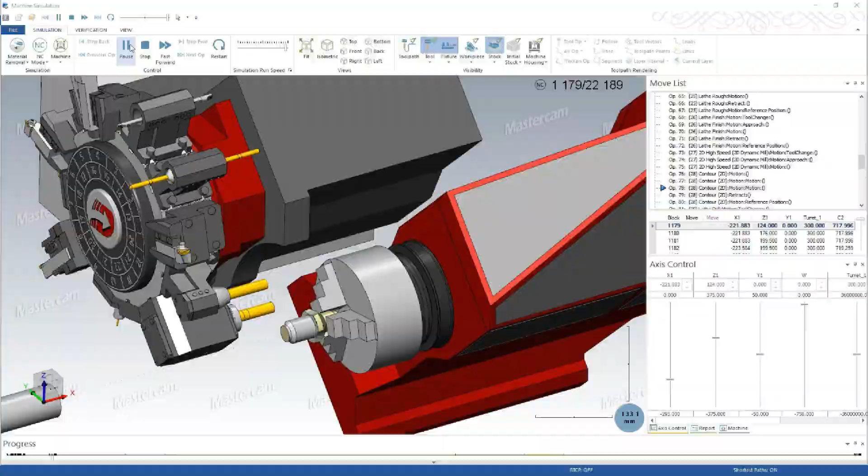In this video, we'll finish the changes needed in our setup to simulate with no collisions or errors, and we'll do this by changing our scallop toolpath from Y to C axis, and we'll create an extension for our 3mm cross end mill. One of the collisions simulation alerted us to is the machine housing hitting the chuck jaws while the 20mm face end mill is cutting the scallop feature, as we can see in this screenshot here.

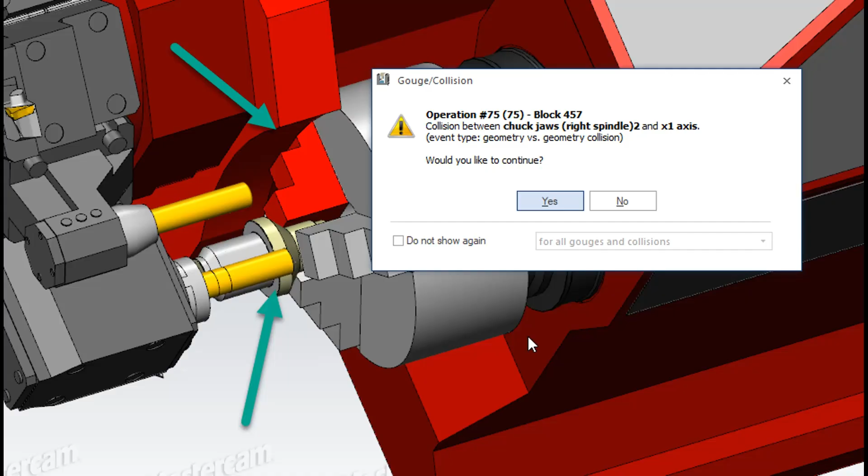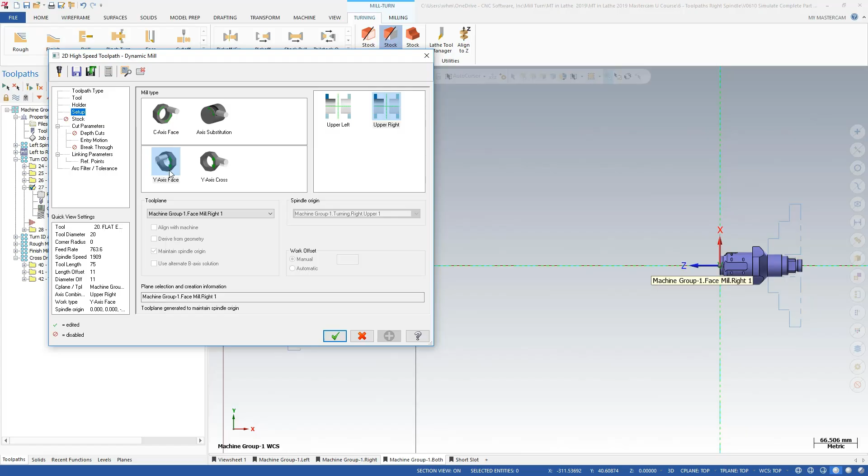and I'll open operation 27 and the parameters, and in MT for lathe you can see in the setup node we have selected Y-axis face. I'll simply select C-axis face and green check out. I'll do the same thing for the finish operation on that contour. And I'll regen all, and that should take care of that collision.

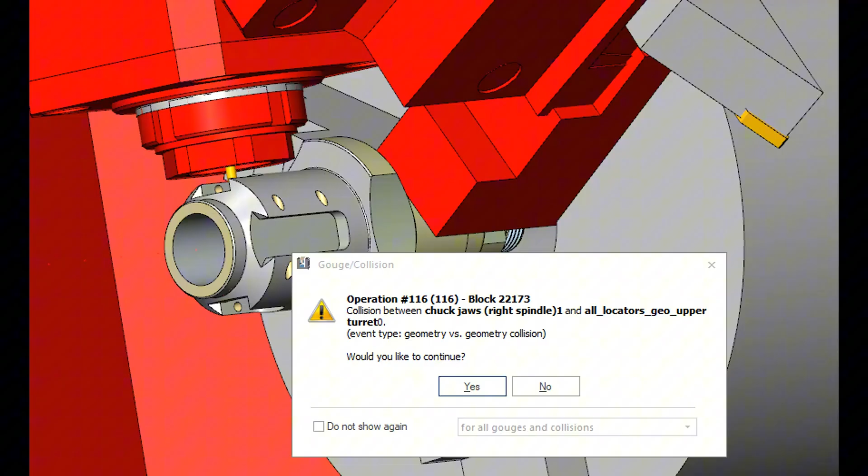We determined in the last video that we would extend the projection of the 3mm end mill by 60mm to provide enough clearance. We'll use a collet extension to do this. But first, I want to remove the projection length adjustment I put in previously to eliminate overlapping adjustments. You can see I have the tool setup manager open here, and index position 9 is expanded.

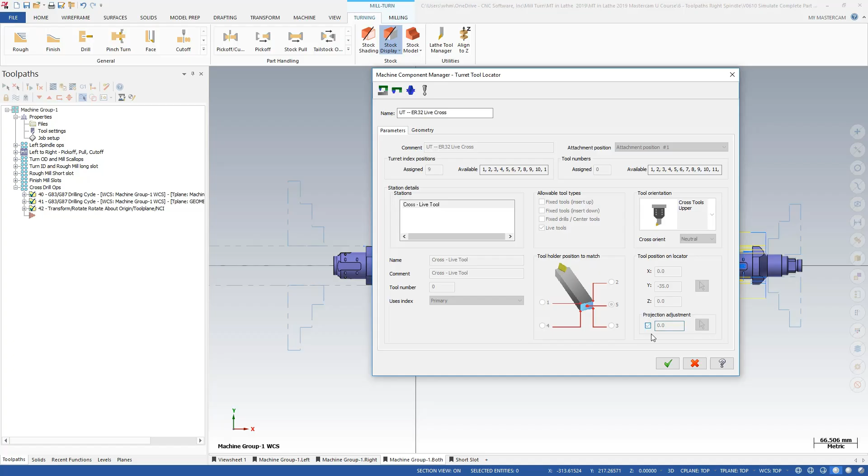I'm going to right click and go to properties. We have a projection adjustment amount of -20mm. I could change that to 0, or I could just uncheck this. We'll do both. Next, I'm going to go into operation number 40. And in the parameters, I want to create a new holder.

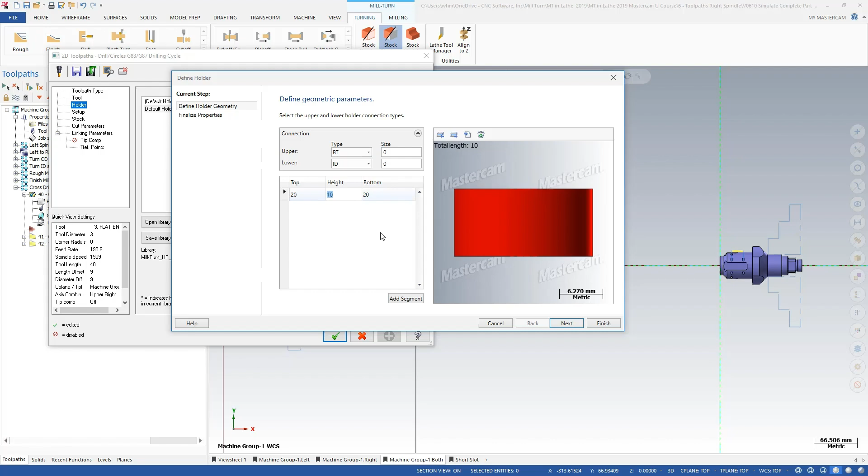And this holder will have a diameter of 20, both on the top and the bottom, and a height of 70. And we could name this. We'll call it 20 by 70mm extension. And I want to change my tool projection down to 25. We'll tighten that up a little bit while we're here. And you can see that it won't let me.

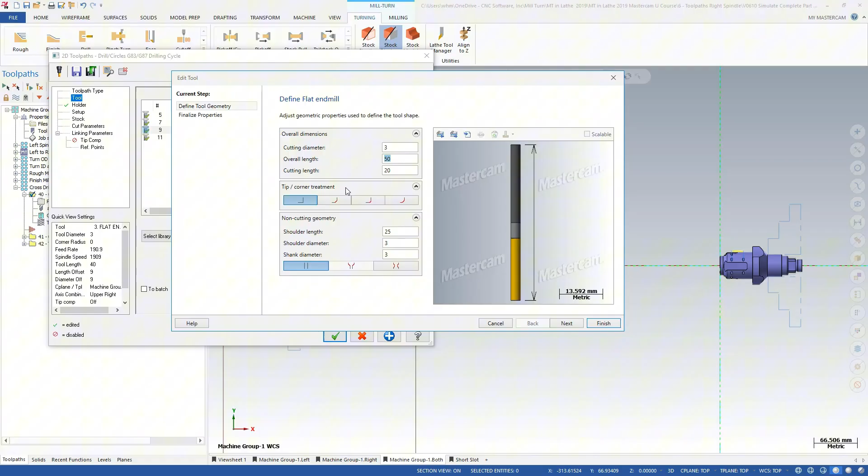So in order to do that, I need to go back to my tool, and I'll right click and edit the tool. I'm going to change my cutting length to 20, my shoulder length to 25, which is the amount I'm going to project it from the holder, and the overall length to 35. Then I'll go back into my holder and I can change my tool projection to 25. The max projection length allowed is determined by the shoulder length of the tool, which we just edited to 25.

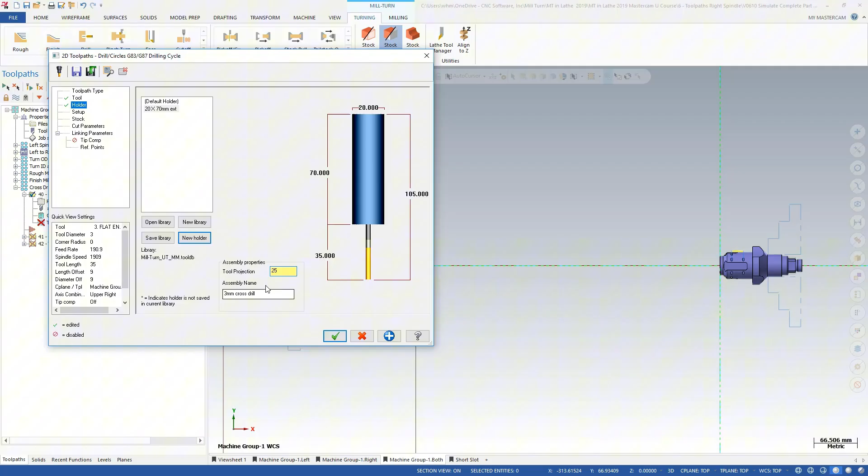This will actually give us a net change of 70mm, which is a little more than the 60mm I set out for when we started, but a little extra will help us out here. So I'll go ahead and regenerate that. And we should be all set to simulate with no errors.

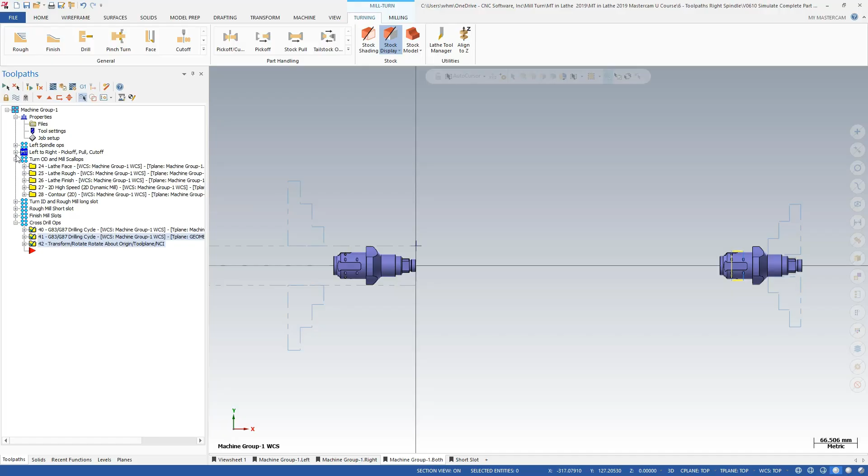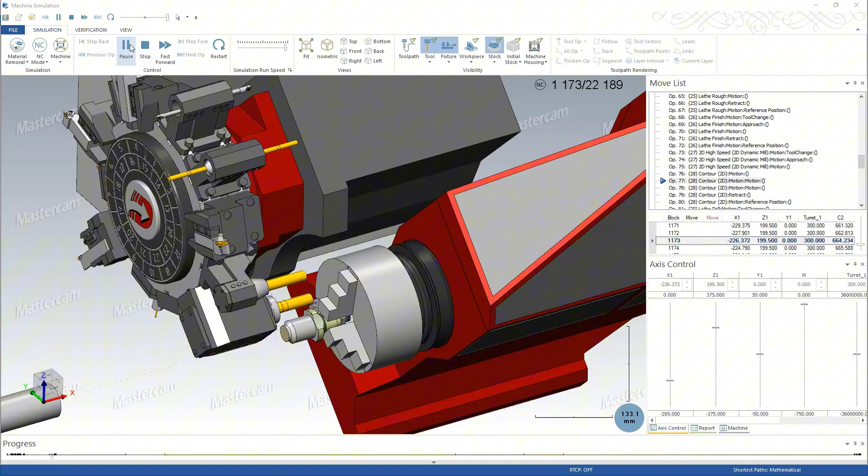I'm in simulation and have advanced the move list to operation number 73, which is right before where the turret housing collided with the chuck jaws. I'm going to go ahead and run from here. With the C-axis toolpath, the tool stays on the turret side of the spindle, eliminating the motion to the far side of the part. You can see the finish op. And that looks good.

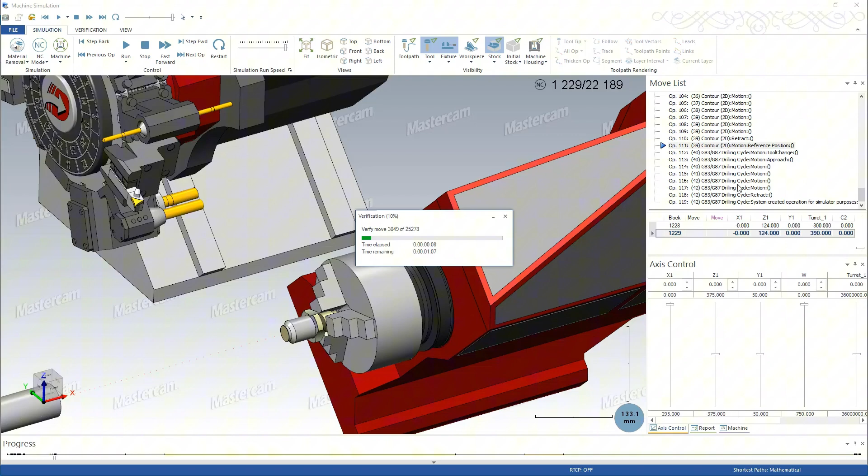I'm going to jump ahead to the 3mm cross drill operation next. We'll go ahead and run that. You can see the extension we created here. And we have enough clearance to clear the chuck jaws and the chuck.

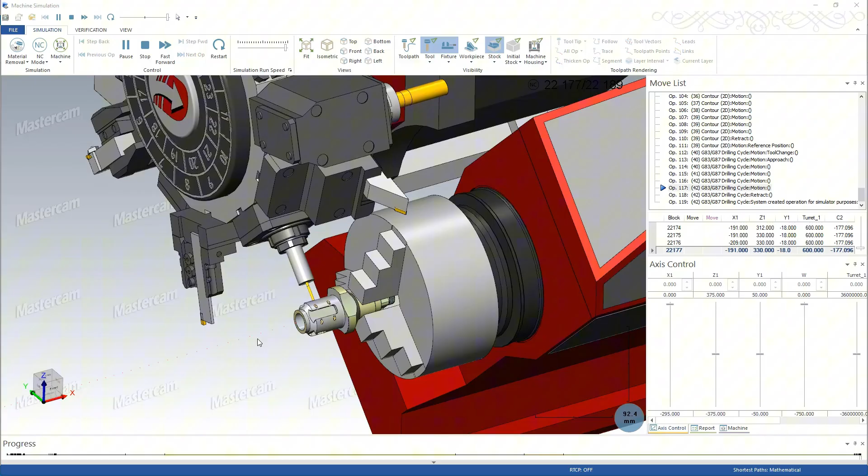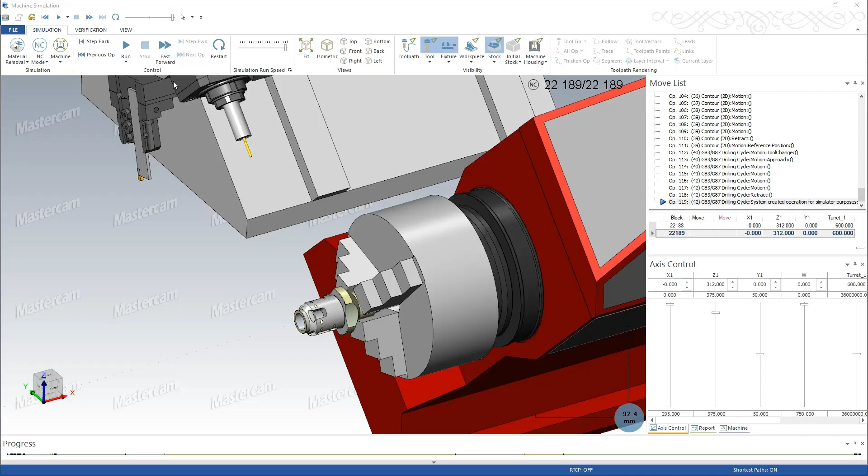The concepts that have been taught will help you create a setup that mirrors what will be on the machine. Simulation is, of course, only as good as the accuracy of how it mirrors the setup on the machine. At this point, it would be a good idea to run simulation from start to finish to make sure our last changes did not affect areas that we did not see in our quick check. I'll let you do that on your own.